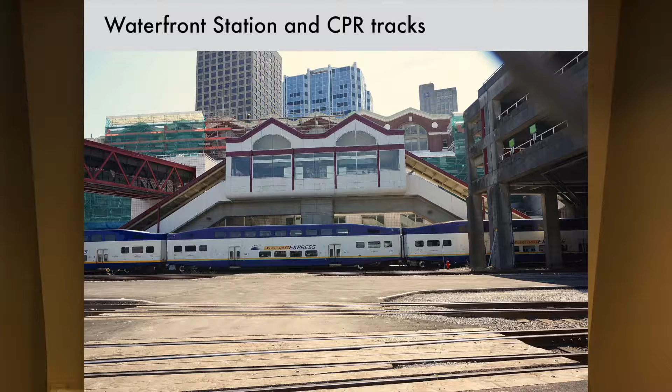Today our conversation is about the future of our downtown waterfront. A glassy mountainous tower looming over historic Waterfront Station. An approved 30-story tower across the street replacing this parkade. Towers perhaps replacing portions of the historic Sinclair Centre. The city's best views from its Celebration Street, Granville Street, hidden for decades by the black mob of parkade entrance. Inhospitable landscapes and streetscapes. The only street level views of water and mountains possibly lost. New developments being designed over the train yard. Tens of thousands of people passing daily through the province's transportation center without a reason to linger. A city transportation and development plan years in the making, very well done, but lacking an implementation strategy and perhaps needing some tweaks.

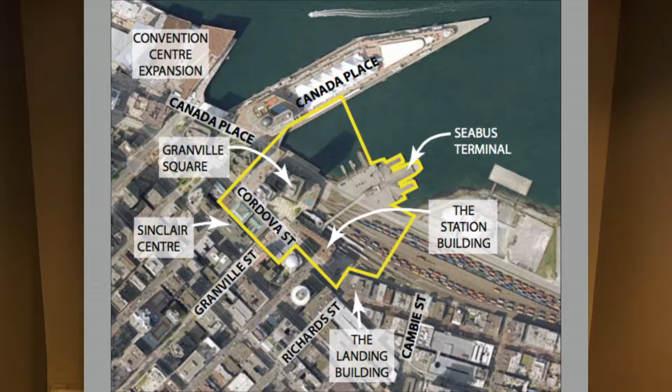Vancouver's downtown waterfront is suddenly in play, and all of these projects and opportunities seem to be on independent tracks. Do landowners and developers make independent decisions, or does the city act as a coordinator, facilitator, and advocate for the public?

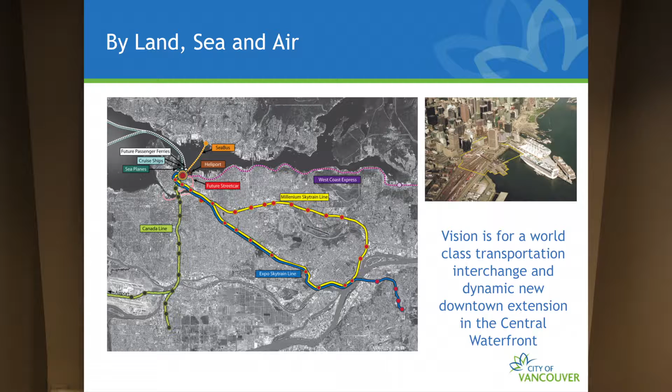So the vision for the Waterfront Hub Plan is for a world-class transportation interchange and dynamic new downtown extension in the central waterfront area. The hub study area included the lands, the Waterfront Station, Granville 200, and over the rail tracks, and included the SeaBus area.

Just before we move off this, I want to make a comment from a transportation perspective about looking at a transportation hub. This area basically has all modes of transportation in it, and I challenge you to find a place in the world that has all the transportation modes that are in this location. Because we have air, we have rail, there's freight movement, and that's the big one - when we were doing the study, I couldn't find a location that had an active freight rail yard underneath the hub development there.

And then seaplanes, helicopters, cruise ship terminals, basically everything in there that you could think of. Land ownership of this area is quite complex.

You can see by the diagram here that the track lands we were looking at were actually owned by Vancouver Whitecaps. Long before the hub plan, the Vancouver Whitecaps were looking to locate a soccer stadium there. I don't know if any of you remember that. But they still own the lands, and the rails have the right to operate within those.

The waterfront station and Granville 200 are both owned and managed by Cadillac Fairview. And of course the federal government owns Sinclair Center, and Vancouver Whitecaps are the owners representing the recently approved tower at 320 Granville. So the city doesn't actually own any land in this particular area.

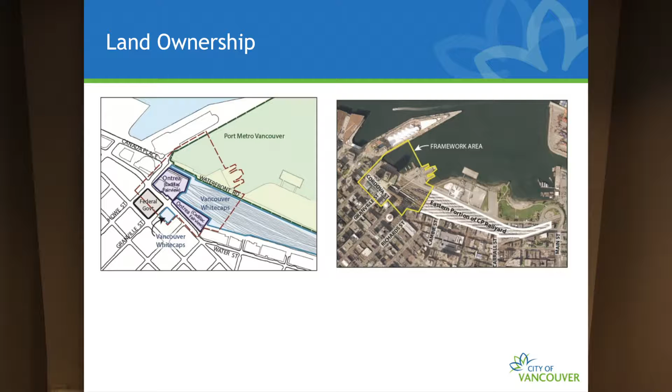I should also mention that the port owns land in this area as well. So the city actually doesn't own any land in this area. However, we do have some rights of access, particularly over the east end of the waterfront station site. We have a right of access to create a road through that parking lot that exists today. That road has been called the Cordova Connector.

So the urban design and transportation objectives for the plan have three main pieces: connect the city with the waterfront, introduce a high-quality new development integrated with a transit hub, and create a world-class transportation interchange.

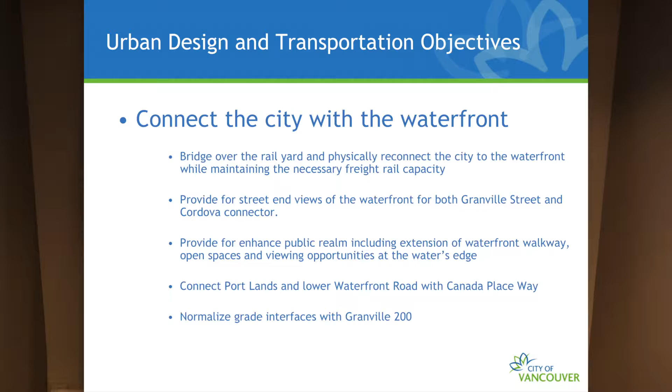Now, you have to appreciate these diagrams we're showing here are showing roads that are elevated at grade heights over the railway tracks.

Another objective was to try and achieve a long-standing urban design principle the city has about creating street-end views, in order for pedestrians to be able to see the water or the mountains beyond. We can certainly achieve that with the Cordova Connector. One of the big challenges is how do we do that with Granville Street. So that was an idea we thought was important in pursuing and understanding how we could achieve that.

So the plan actually looks at how we can get what we call the Granville Street extension, and at what elevation it would connect with the Canada Place extension. And then another road in there is a hub street. Steve is going to talk a little more about the transportation needs of the area and why this series of roads and how they're configured are critical for serving the area, not only the development of the area, but also the transportation hub.

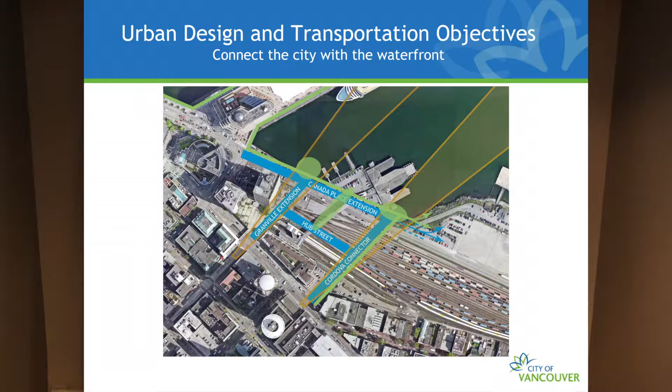Another objective with connecting the city to the waterfront is to extend our waterfront walkway that goes around the edge of the city—that was a key goal. Also to look at open space opportunities, particularly at those street-end views, to provide people places to look out over the water and to the mountains beyond, instead of being held back, as we are today, by the rail tracks and the current little parking lot plaza. Also to look at open space linkages within the plan to help facilitate transportation movements between the different modes.

The next urban design objective was to introduce a high-quality new development integrated with the transportation hub—to create a high density commercial and mixed-use development that takes advantage of excellent transit accessibility, supports increased transit ridership, extends the central business district, and complements the activities of Gastown. The architecture of the area would be of exceptional quality, reflecting the prominence of the setting and respecting the existing heritage buildings, with a commitment to environmental sustainability in all aspects of the design and construction of the buildings.

Oh, sorry, it just looks the same. Sorry, that's me. Okay, so from a transportation perspective, there was a number of goals within this area.

As we mentioned, the passenger concourse right now doesn't really respect the movement that's required in that area. So having a more grand passenger concourse where all those movements can happen without feeling constrained.

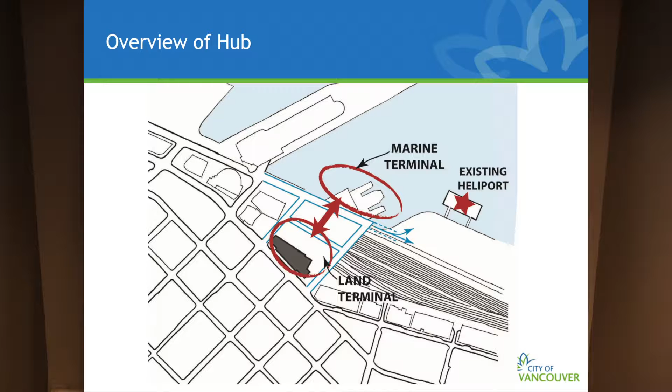So looking at the components, we need a good connection between the marine terminal and the land terminal, and the ability to have all the connections at the land terminal, but also connect to them in a way that can act as a fare-paid zone, so you don't have to go out through fare gates as you connect to all these different areas. There's also the existing heliport there, which is something we explored, how that can continue to happen in the area.

I'm just going to skip through some of these and go to the street network. Before I hand over, maybe I'll talk a bit about some of the challenges of the street network. Right now, if we look at the existing network surrounding the building, we have Cordova Street and Howe Street. On Howe Street, that's the entrance to the cruise ship terminal.

If you've been down there on any of the most recent weekends, on the very busy cruise ship days, that just shuts down that area. So having that as the main entrance into this area just doesn't work. Also, the Cordova Connector, although really important for providing transit circulation between Granville Street and looping back, would only be a right-in, right-out connection because from the east it's only fed from Water Street. So the Granville extension is really important to have that full movement connection for all the buses that would want to come in here and connect to the hub street.

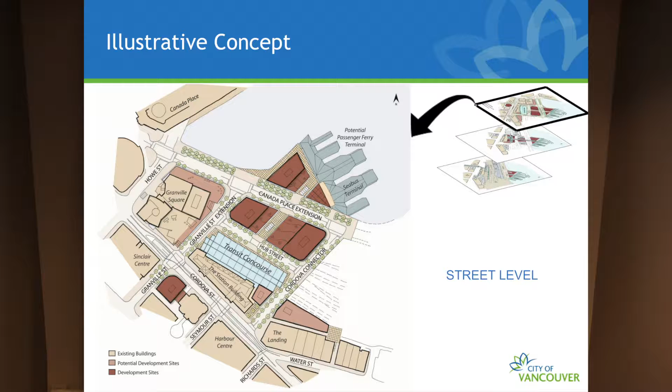The recent downtown transit plan review survey found everyone said it's really hard to connect into Waterfront Station - that was a big theme that came across in that consultation. And then Canada Place would provide the extension of the Greenway network, eventually connecting down to Waterfront Road with future port development there.

So just to touch a little bit more on the Granville Street extension, what we learned in the study was that one thing we really wanted to fix was the elevated structure of Granville 200 and how it's disconnected from the rest of the city, the public realm. The bridge connection going across Granville Street really impacts Sinclair Centre, and we'd love to see that removed.

So we actually did quite a structural study to look at removing the upper level of the parking and the plaza of Granville 200 and allowing the road through. What we learned was that because that facility was originally built to support fire trucks, it's actually been built to road capacities. So that was a very interesting understanding that the road could go through with some upgrade to the existing structure, and by removing that upper level of the parking structure, the road would come through more naturally.

As we move through, the next level down is the transit concourse, which is below grade, but it allows for connections to the Canada Line. Instead of right now where you go up and through Waterfront Station and have to go back down again, this would allow for a more level connection into the transit concourse, a below-grade connection underneath the Hub Street and Canada Place extension.

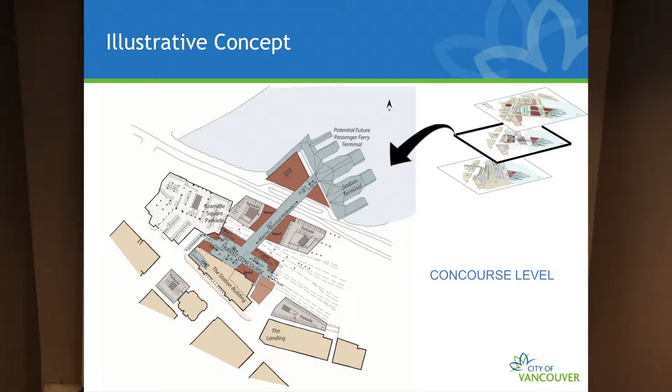And we also looked at how we would support additional building structures on either side of that transit concourse.

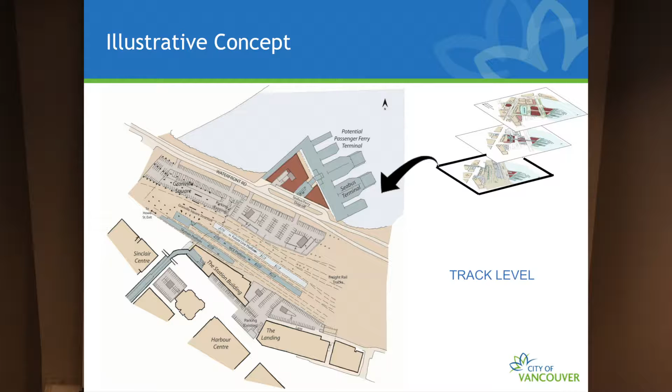And then finally, at the lower level, we were looking at expansion of transit rail systems, and we were also working quite closely with CP Rail. It did require some minor alignment of some of their rail tracks in order to achieve this, but it was all within workable means from their perspective. And those rail tracks are there to stay. They're actually doing expansion on the two container terminals, increasing both of them by 50%, and this was a key yard for them to be able to support that movement.

So I'm just going to do a little section through. We see here Waterfront Station on the right, and as you come through Waterfront Station, you're dropping down to a new transit concourse level, one that is connecting below grade, but it also allows a connection at the Hub Street level, which is also important for where the buses will come into this facility.

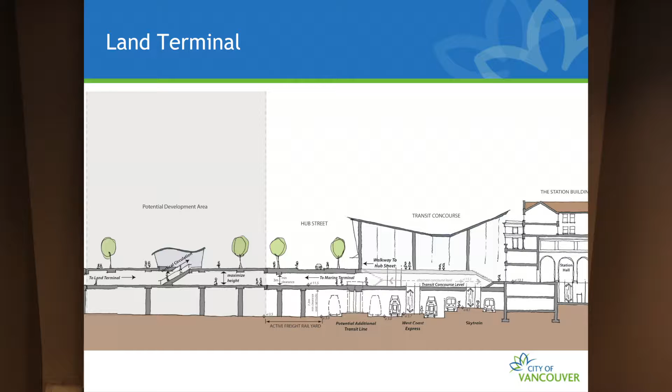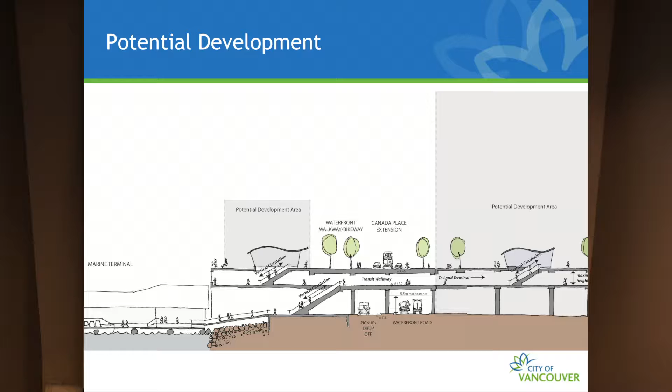Then we move through the potential development area, those other buildings, and then eventually out to the marine terminal, always with an opportunity of taking a choice, either making a connection below grade or coming up at various points to make that connection at grade.

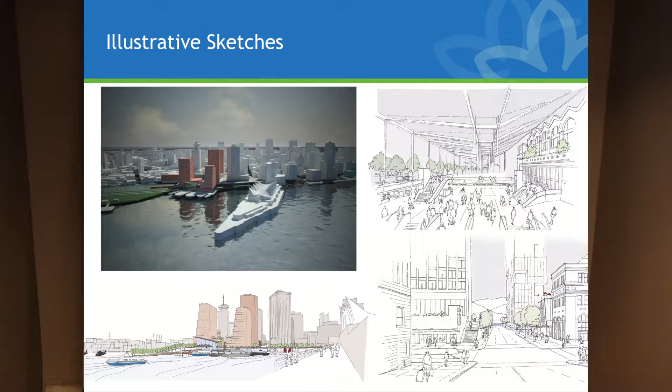So here are some illustrative concepts about how the massing of this area would unfold. You can see on the right a sketch of the concourse itself opening up and exposing the north side of Waterfront Station, actually enhancing it, we believe. And then the lower sketch at the bottom shows how Granville Street would actually come through, opening up the westerly edge of Waterfront Station, exposing that elevation, and the removal of the elevated bridge along Sinclair Centre.

So some of our challenges to finish are the impact on the freight rail yards, development funding, achieving the Granville Street extension, and managing and dealing with dangerous goods. Thank you.

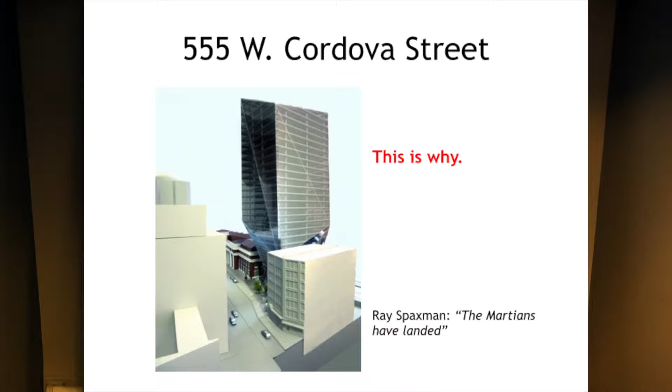It's not that we're inherently negative about what the city does, but sometimes things come along that provoke you into taking a position. And 555 West Cordova was one of those things that a group of people, myself included, as well as others in this room, decided to try to make a point about.

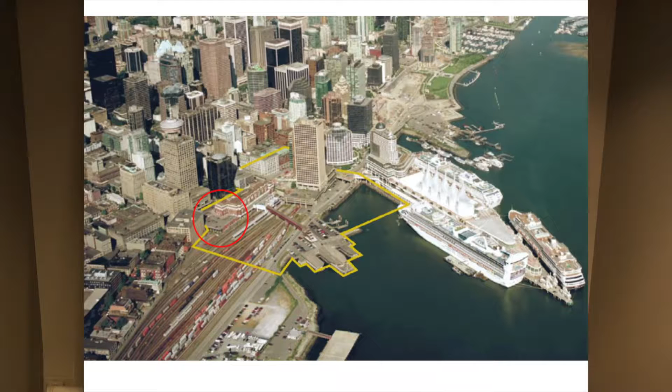What the city is doing seems to be on an ad hoc level. So we got excited when we saw this plan, located right about there, using the aerials from the transportation plan just to orient you. The yellow line is the hub study that Anita and Steve just talked about, so it's quite a bit of airspace and land around there.

Here it is showing in plan view. It doesn't line up with any streets, so it's hard to call it a street-end view, but it nonetheless is an amazingly powerful view. And we think that missed opportunity of using that is really important, not to miss that opportunity.

The Transportation Hub Framework Plan called for an 11-story building in that location. It does show the Cordova connector coming through there, which is taking up half the space. So one of the framing questions I'm going to have is, do we need a full road space through there? I think the argument can be made probably both ways.

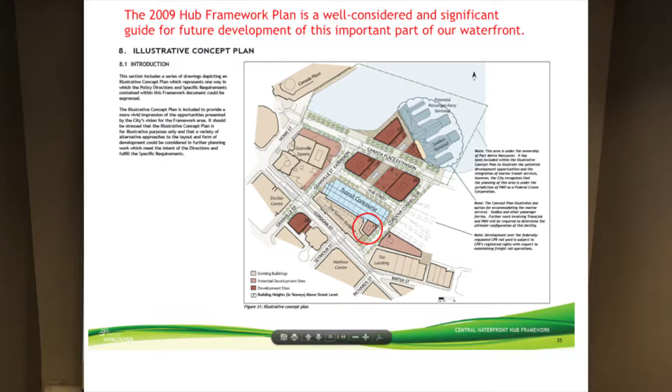This road here, which I imagine is a 20-meter road allowance, would be the same width as, say, Howe Street and other streets in the area. So we got excited about the opportunity here, but also disappointed with what was coming forward with the application.

Excuse me, this is a very sensitive device.

Another outtake from the hub study, and it's a wonderful diagram, I think. It shows sloping down in heights from the waterfront, from new buildings over the tracks and in this space towards the scale of Gastown. To me that's a framework principle, and it respects the height of Gastown, which goes up to maybe 100 feet in some places, but generally speaking 3, 4, 5, 6 stories. In the case of the landing, about 7 or 8.

It also says slope down towards the waterfront, which, when you think of the domical shape of the landform downtown and having a similar domical shape for heights of buildings, where the tallest buildings should be in the middle and the lowest buildings maybe towards the edges at the water, that would follow that kind of principle. Again, not a bad one.

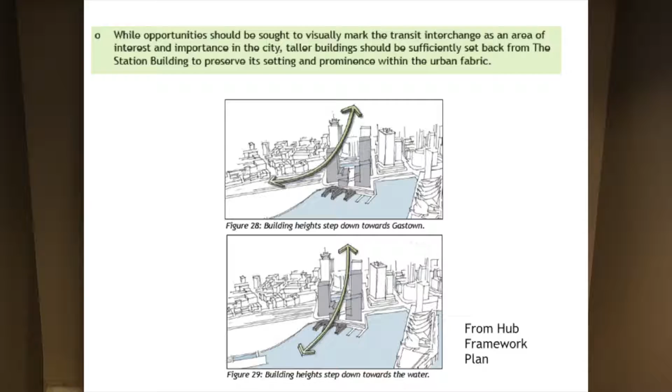Anita showed this plan before, or this sketch. But since this drawing was done for the hub study, I'm going to stand over here because it's hard craning my neck. Since that time, approximately, the federal government has come in and said they have certain space needs for themselves. It could be up to 1 million square feet.

It could be quite a bit less than that. But the interesting thing about that number is it's almost exactly equal to the 1 million square feet or so that is planned for over the tracks. So there'll be a framing question about what happens if this goes forward. Will there be any demand left to build this road extension and get out over the waterfront?

On the positive side, if it does happen, as Anita mentioned, the overpasses and other poor connections, and hopefully the street extension like this, will eventually happen. And fundamental to our thinking in our waterfront group is whether this goes forward sooner or later. If it goes forward, it has big positive implications. If it never goes forward, it has large negative implications.

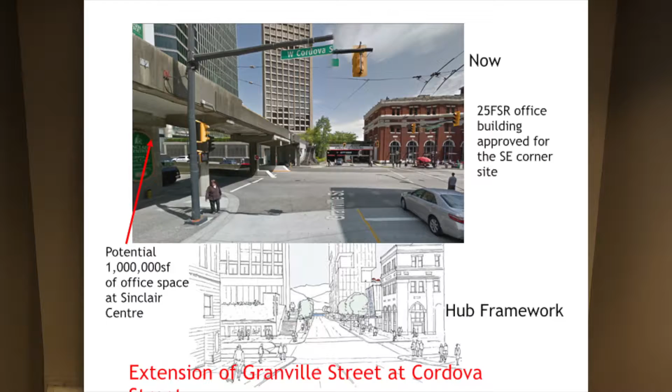And we have a warehouse building from the late 19th century, the landing, very simple format, slab kind of building, also masonry, at about 7 or 8 stories. So those are good reference points when you think about neighborliness and relationships. Do you want to loom over your neighbor, or do you want to be more in keeping with your neighbor?

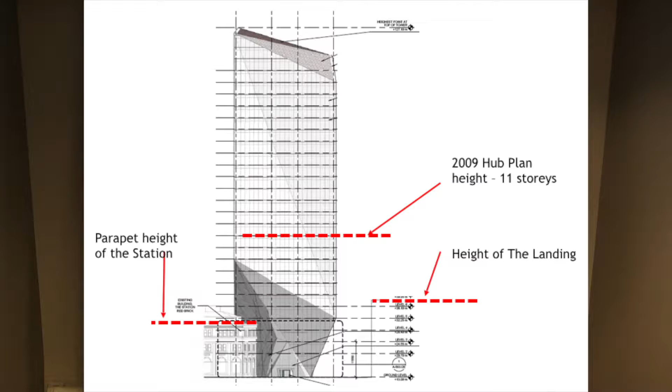Would this woman here be comfortable talking to you like this? Or would it be nicer if I'm sort of down here, we're looking at each other and having a good conversation? The red line is approximately the height of the 11-story building that I referred to in the hub study. So you can see that more than double the height is being proposed in this application, generated by the view cone from Queen Elizabeth Park.

Sort of a technical thing, but it's very important. It shapes an awful lot of our downtown.

The shaded area here is the upper part of the proposed building, 18,000 square feet. The finer line is indicating the floor plan of the ground floor and tapering up.

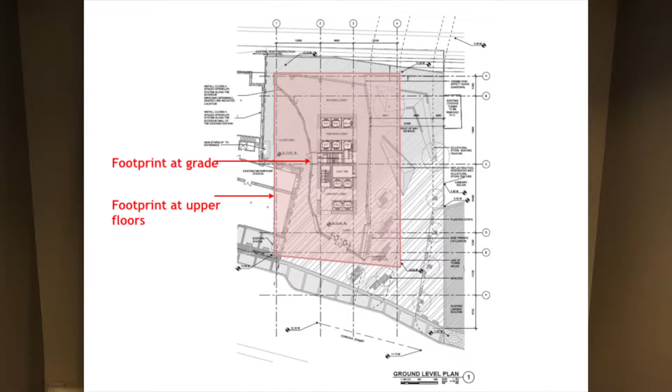So it has this quality of being a small footprint and big building. We already have one of those in the works around here. Here's how it shows in the setting.

This is a comparison to what the hub framework plan called for on that site, and this is what the development application called for. You can make your own assessments about whether there's any coordination between these two. As much as I think the hub framework plan is a major statement, a good and flexible statement about the future evolution of the waterfront, when the first thing out of the box looks like this, you sort of question the whole plan.

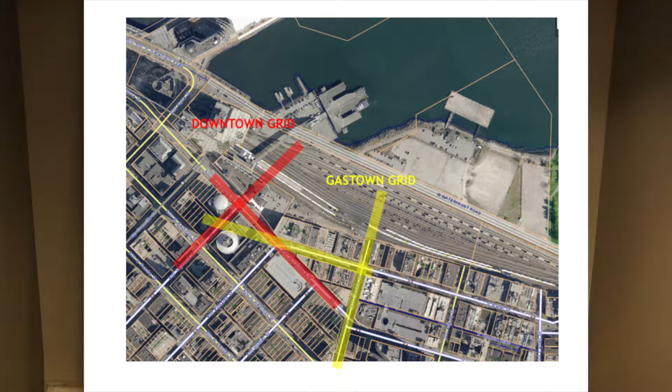The area has different intersecting grids. I'm not going to worry about too many of these things. These are the access points we have right now: Howe Street, a potential extension of Granville Street, and then the one here that Steve mentioned would be right in and right out, should it go across at this location.

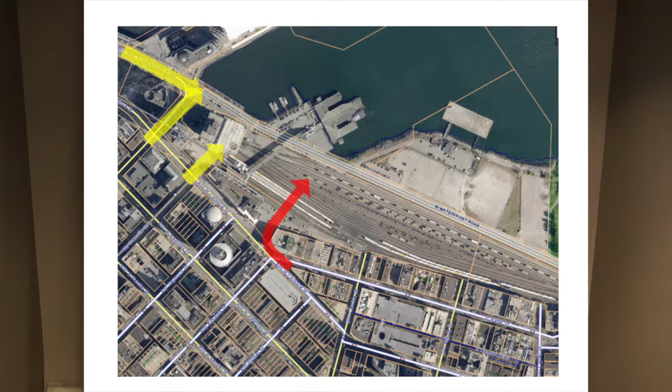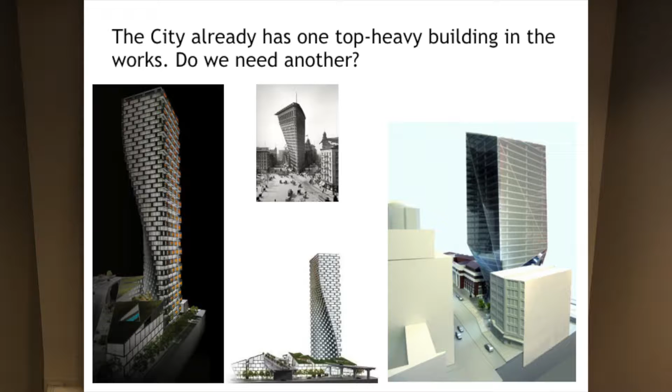We already have top-heavy buildings being planned in this city. I think of what's now called the Qube out there on West Georgia, which has the suspenders—that's our first one, a tiny footprint with a massive building sitting on top, actually quite famous in its day. And we've got this one here at Vancouver House being proposed as well, for a whole set of other variables that affect that site. The question to me is, how many times are we going to do that?

So I'm going to go into our propositions, our thoughts, mostly my thoughts. I'm not going to blame anybody else.

We had the 3 levels. What's happening with the—oh, we got the pointer on. No, something walking around here? A mouse? You fixed something.

Anyway, that blue line represents the 15 stories from the downtown east side plan and parts of Chinatown. So you can see above 11 stories, there's a little bit of leeway to be a taller building because of its importance, if it's a good enough site to do it.

Yeah, I get the message. Okay, I'm sorry, I'm trying to do the best I can.

I think above that 11-story height, it has to be earned. There have to be performance qualities about public realm, about architectural design, about access, about what's good for the city as a whole—not good for just the development, but good for the city as a whole.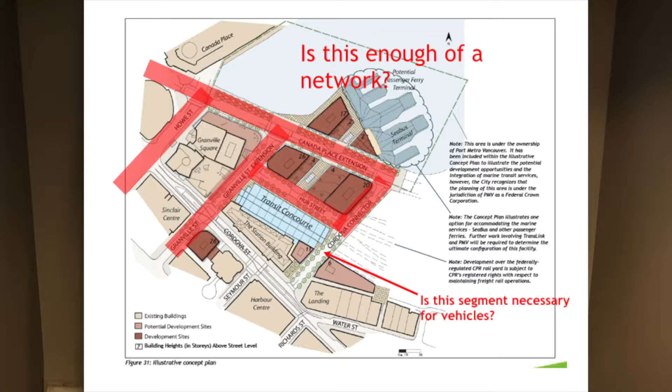Another question is, Telus Gardens did an unusual thing—it somehow commandeered some of the airspace on both ends of the building, I think for private enjoyment, I'm not sure. If that's indeed a good precedent, can we do a similar thing with that road extension rather than over the CPR Station, because the present design leans that way, but lean the other way over the road and use it for public purposes? You're trying to get a bigger footprint for the building, which may bring down its height.

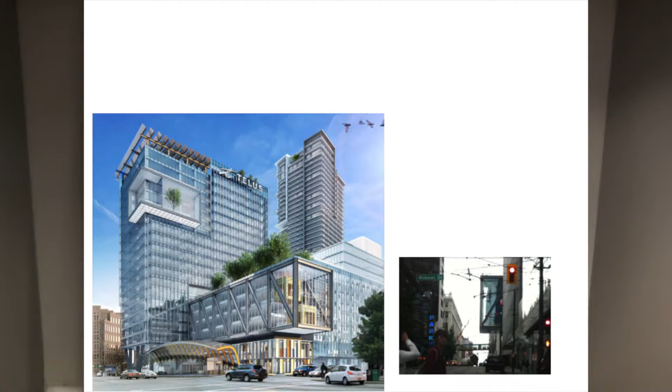Next slide, please. Can you do that?

Should the implementation plan—and I haven't really talked about it, but it was mandated as recommendation B in the 2009 council report—there should be an implementation plan developed for the hub. That means detailed infrastructure, streetscape and public realm, the quality of things, maybe even design guidelines, what kind of character-forming characters the buildings should have. None of that has really been done.

So the question is, in other cities, you don't get to build something until you've done that kind of implementation plan. In a sense, this is a bookmark in time until that implementation set is done, through a public process.

What could be done to open up Granville Street sooner rather than later? I see 1 million square feet on one side being thought about, and 375,000 square feet recently approved on the other side of Granville Street. We have a proposal here. Can any of the DCLs and CACs go forward and pay for that? And can residential use supplement and animate spaces of the track without being the dominant use? And if it is opened up, can the right-of-way through that site be reduced or eliminated and used only for bikes, peds, and emergency vehicles, and be a better neighbor ultimately?

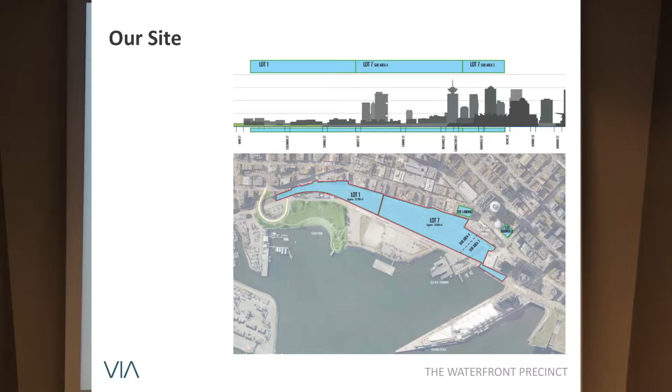So if you do the general math, you get FSR gross would be 3.5 million square feet, mostly gathered at the Western Hub. Da-da-da-da, off we go. How much, how high, whatever—later is the time for numbers. This moment today is about the poetry of opportunities and constraints, and most importantly, aspirations.

So I want to frame the aspirational part with a quick spin through the history of the future of our lands.

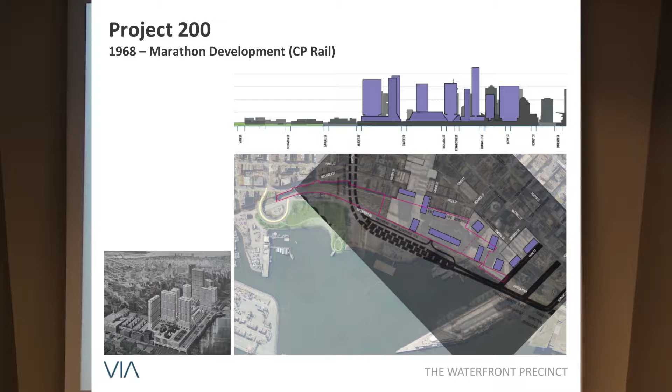Now, the top in each of these is the plan in question superimposed upon a view of existing Vancouver. So in 1968, the Marathon development was a vision, 50 years ago, of approximately 3.5 million square feet on the waterfront freeway. The only part built was Granville Square, becoming today's opportunity and constraint, and actually clarifying some of the conditions required in order to build over the tracks. Ironically, for the Granville Square haters, functional needs are pointed towards extending Canada Place, but not as a freeway.

1979, Central Waterfront Official Development Plan. Now the SeaBus, which you can kind of find in there, was built in the mid-70s. Waterfront Station, which is pretty run down, was renovated. And in the early 1980s, the old Pier BC became Canada Place, towards the bottom of this slide. So this was the period when Vancouver's population was declining, and planning was always couched as fit rather than growth.

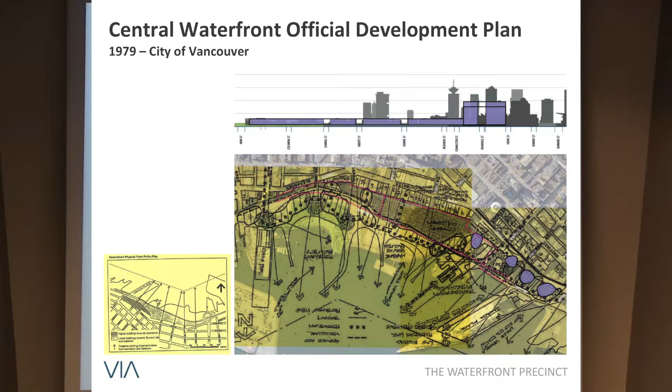Very different context to today. The linear development was shown all the way to Main Street with little regard to the economics of building on the mush at the edge of the ocean. Skipping ahead to the 1990s, Central Waterfront Policy Statement—the port lands north of Waterfront Road being under basically federal jurisdiction. It was a collaborative process rather than a city process.

So this was when the port was seeking a developer for an expanded convention center near east of Canada Place. And this led to the urban plan for the Port Central Waterfront lands north of the rail yards. So the port lands, which extend well out into the water, were shown with approximately 3 million square feet north of the rail yards, the urban form tapering down from the downtown core in the west down to the east.

Now, the rail yards were tacitly assumed to be going away. They're kind of inconvenient, but the SkyTrain had been built and West Coast Express was on the way. One outcome around this process was creating a real available beach, which became Crab Park. And interestingly, the SeaBus here is shown built over. Now, this is less than 20 years old, and note the port's retaining a site right in front of Granville Square.

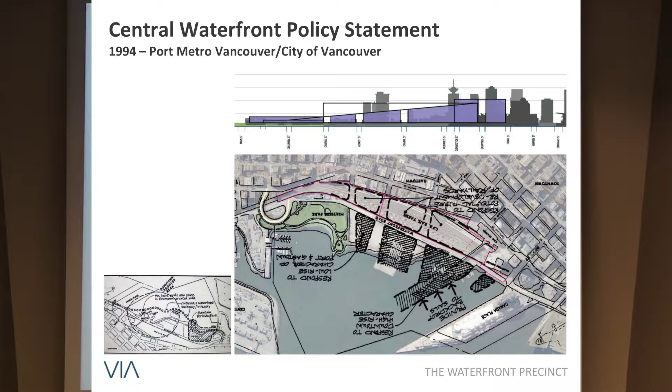Port side, approximately 94 to 99.

The Convention Center expansion, illustrated here, was to be built over the water east of Canada Place, with a casino and tall hotel at the Viaduct Junction. Granville Street was not extended in this scenario, but the Five Corners intersection at Cordova was already known to be a problem. The SeaBus would have been relocated northeastwards with moving sidewalks. But various layers of obstacle and opposition, notably anti-casino sentiment and the cost of development over deep water, killed the project.

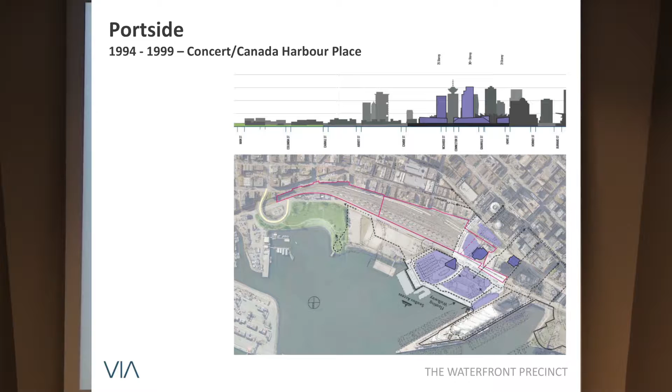The key legacy was a viaduct right-of-way registered across the rail yards. In this period, Marathon, CP Rail's real estate arm, separated Waterfront Station with its eastern parking lot from the remainder of the rail yards. By the early 2000s, the Convention Center had moved west of Canada Place to where it is now.

Then in 2005, as part of the Whitecaps Waterfront Stadium, Greg Kerfoot bought the CP Rail yards from Marathon. So CP Rail as a tenant can continue rail operation, but the yards can be reconfigured for redevelopment, retaining most of the rail capacity. In terms of the stadium itself, our primary focus was on site number 2.

You're seeing three sequential operations. The first was what all the high-level review was about, on the principle of showing the city what would happen if we did it on our land only, as opposed to partnership with the port. In the end, a competing claim between the port and Translink on the water channel between Canada Place and the Seabus shifted to number 3 as the site for the rezoning application, which died the day the city went on strike in the fall of 2007.

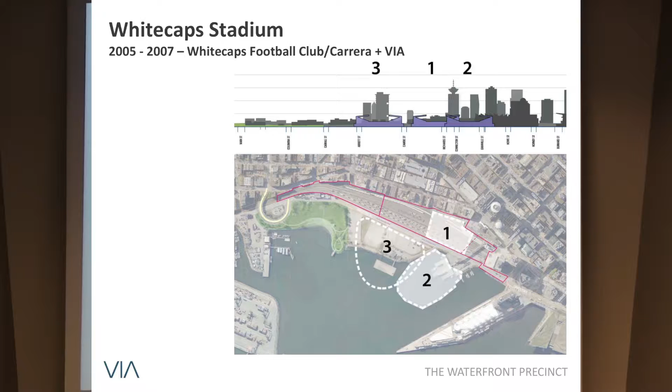This is not about the stadium, but about aspiration for urban life at the water's edge. We call this the People Tower, because who can say no to the people?

The stadium was not about 30,000 people coming to 30 soccer and football games, but about being an exciting hotspot that resonates in the daily pulse of the city. Simply put, it was a park amphitheater with a ring of food and beverage outlets around a 24/7 seawall, with office, hotel, and assembly spaces with an unbeatable vibe.

Starting from the assertion that soccer is a village, which is how the Whitecaps operate as an inclusive community, think of it like Seattle's Pike Place Market wrapping around David Lam Park, with all kinds of seating, sunbathing, and activity stages, surrounded by the seawall and all with a magnificent view of the water and the mountains.

So the People Tower itself, which is on the rail yards, was a complement — a vertical mix of interconnected functions, gathering together the density of the rail yards in a singular form of critical mass, unlike anything yet seen in Vancouver.

Getting into the hub planning framework process of this time period, we absorbed the ambitious vision of a massively expanded transit hub, as presented, and the city's aspiration to bring Granville Street through to the water — it's on our neighbor's land — and hoped someone would find the value to pay for all of this. Very aware of how our land and best column locations were being claimed for the transit hub, our working assumption was that building height would be allowed to compensate for this.

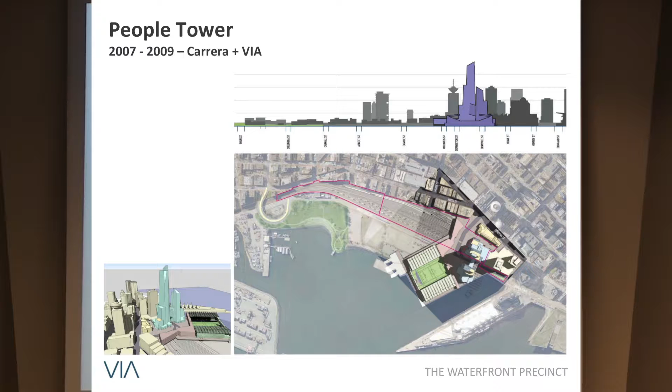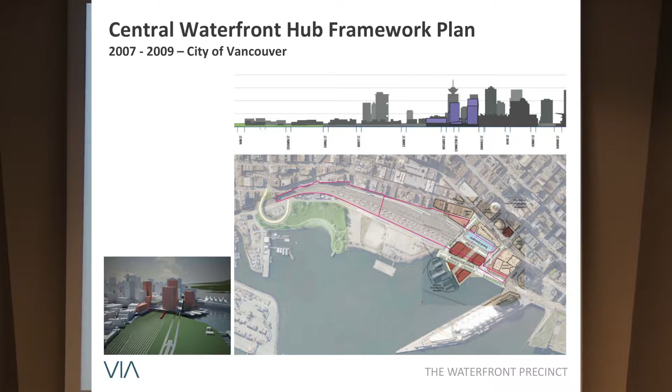But first, the Central Waterfront Hub Framework Plan. This is not the exact drawing we would have drawn — we're very wary of being boxed into third-party agreements. But there is a fundamental, simple, and sound urban logic at work here, a framework we're now starting to flesh out. So that brings us to today.

What is to be the road? What is pedestrian passage? What is gathering place? What is to be covered? What seeks to attract sunshine? And what seeks to be a winter garden?

There are many levels of debate to be had about moving the vision forward, and a few million square feet of successful development need to be encouraged here to provide the unique excitement of the center of the city being at the edge, of making this place a fundamental workhorse at the heart of the region and a place of delight. Well-paying commerce is essential for this sustainable vitality, and this will also be one of the most inclusively accessible environments in Metro Vancouver. So our planning is starting with the fundamentals of infrastructure, and we're connecting the dots — you see the three key control points.

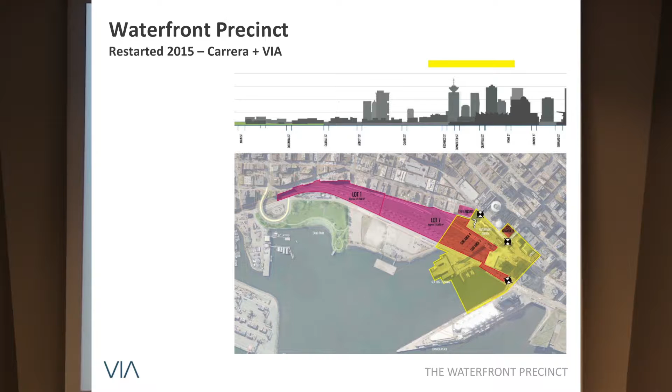And assembling a ring of tall building forms, imagine them expanded like a series of Rubik's Cubes, linked below grade, at grade, and possibly one or more levels above grade. And the early key question is what is to be placed at the point of compression, that is 555 West Cordova, that will make the best possible synergy with our bigger vision of the waterfront.

So that is the context that we're now coming through to this consideration of the Central Waterfront. And time for a conversation.